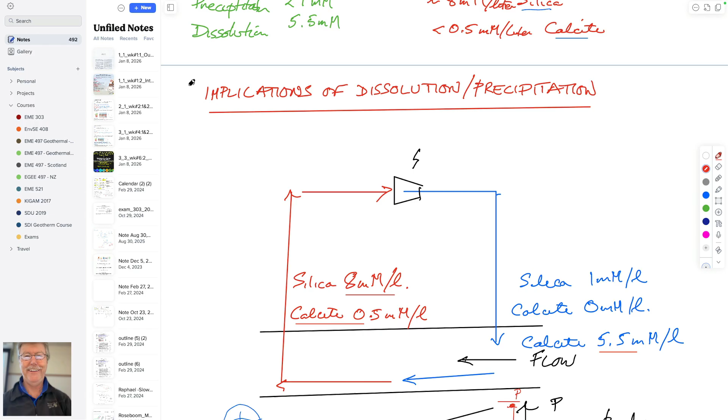I'm feeling punchy today, I guess. I'm not sure. No comments for the good of the order.

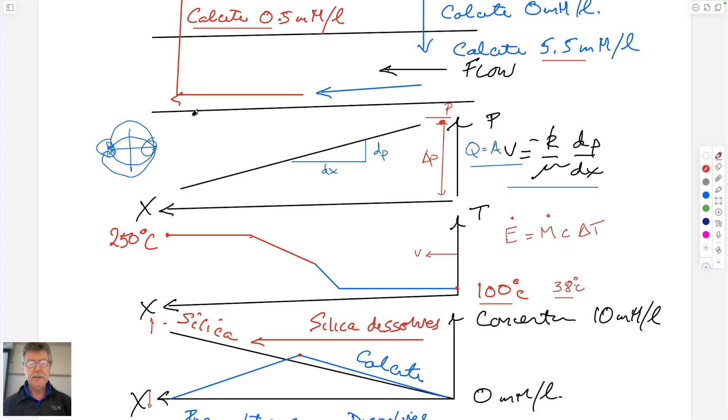I noticed in looking at the previous recordings for these classes this week, 6.1 and 6.2, that they had nice long introductions of places, of geothermal reservoirs around the world - Svartsengi in Iceland particularly starred, I think, on today's one in 2022 or 2021, I can't remember which. Anyway, I haven't done so much of that. I don't think you need so much mental health help now that we're way out of COVID - I think people were a bit more tender in those days and could use it. So that's why we did that.

We'll carry on talking today about geochemistry.

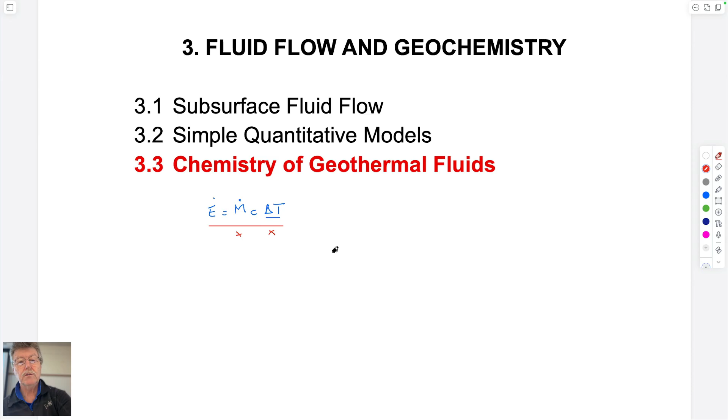Remember last time, if we zip back, we made the case that this is our all-important relationship that we have to deal with. We only make geothermal energy when all of these things are up, and two of them are under our control largely - if you use CO2, it has a different specific heat capacity. Mass flow rates by getting lots of water through in highly permeable connections, high temperatures by getting water through in tortuous connections which have large heat surface area, as we've talked about. And those can be influenced by mechanical changes, thermomechanical changes, contraction of matrix blocks and dilation of fractures as a result of that, but also due to chemistry effects.

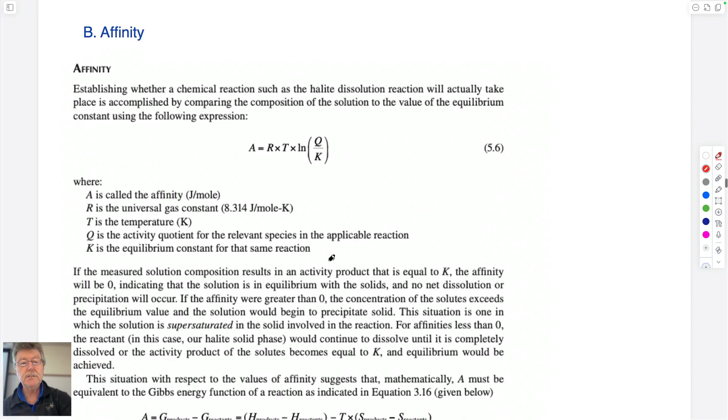So we talk about chemistry of reservoirs, the concentrations are typically high. We can look at understanding how dissolution and precipitation proceeds within reservoirs, whether they're retrograde or prograde reactions, and we can say something about the rates at which those occur, in addition to being able to define the equilibrium characteristics.

And we talked about looking at how these reservoirs are interactive in terms of processes - the physical flow condition, the chemical transport condition, and also temperature transport in those reservoirs. We represented it in the concept of these longitudinal sections from injector to recovery well.

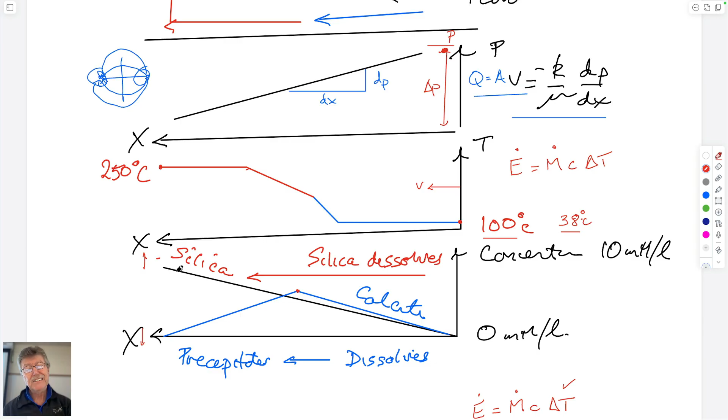We made the case that depending on the temperatures, we net dissolve material such as silica as the temperatures get hotter as we go through the reservoir, or precipitate retrograde minerals such as calcium carbonate as we go through. These would expect to have some influence on permeability, and in affecting permeability, maybe silica is not so important because we saw last time that the concentrations at equilibrium are quite low for silica.

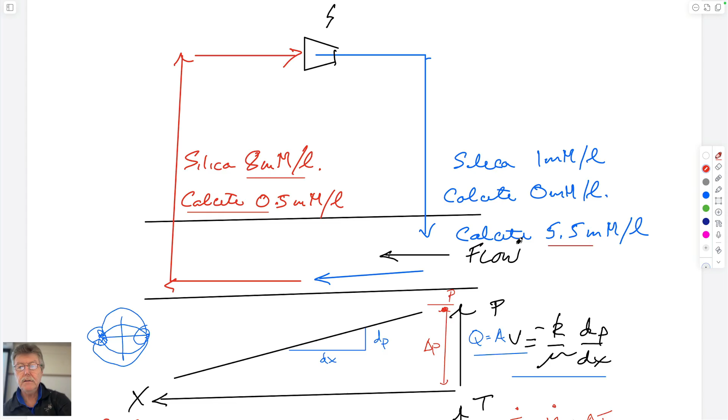Actually, they're similar to the temperatures we were looking at. But if you look at deposition of calcite, you'd expect to see that reflected in a signal on the flow system. And if we're precipitating at outlet, for instance, we'd expect the influence of that to look like this.

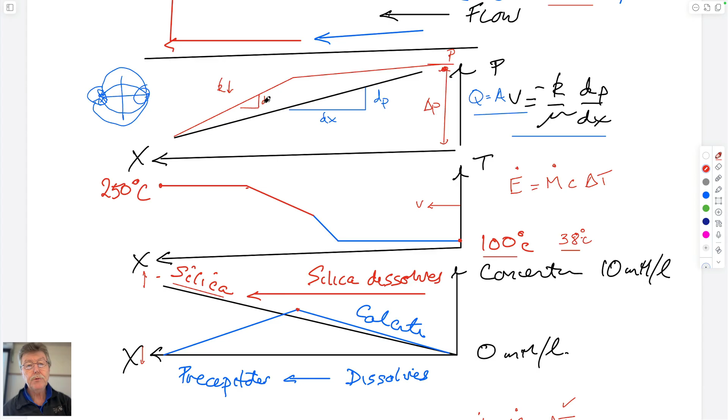Pressure changes across the reservoir would be altered, because if we have the permeability go down here, we have to have higher pressure gradients to drive fluid across the reservoir at the same velocity, because we have continuity if you just think of this as a one-dimensional flow within a tube. And so this interaction is kind of important to us.

There are very complex models to look at that. This isn't a modeling class. There's certainly stuff online you can find to get insight into that.

But we did make the connection last time that in terms of these three fields - flow behavior, transport of dissolved components, and transport of heat - we can define those by conservation equations that say the transport of some quantity, be it pressure, concentration, or thermal energy, conforms to mass: quanta of that in versus quanta out, and what doesn't balance ends up being an accumulation of that property.

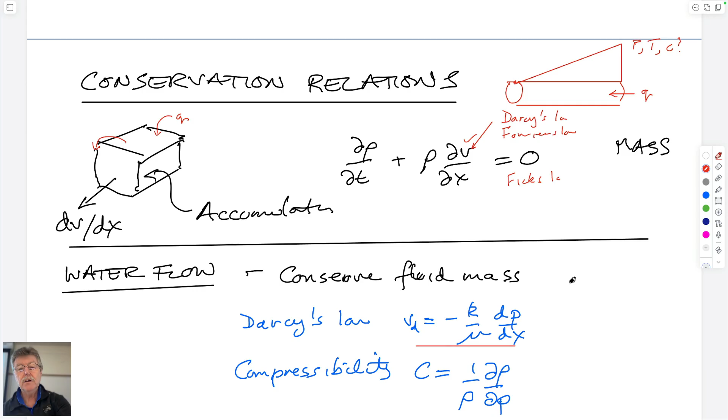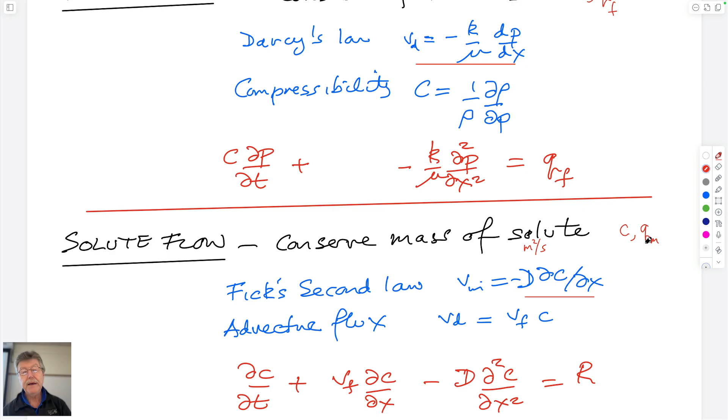And so the dependent variables we'd have for the flow system would be in terms of pressure and volumetric flow rate. The components in terms of mass solute would be concentration of that solute and mass flow rate of that - mass flow rate of the solute carried in water with advective and diffusive fluxes. And if we're looking at solving for the heat flow within the fluid and the reservoir, then the conserved quantity would be temperature and a heat flux.

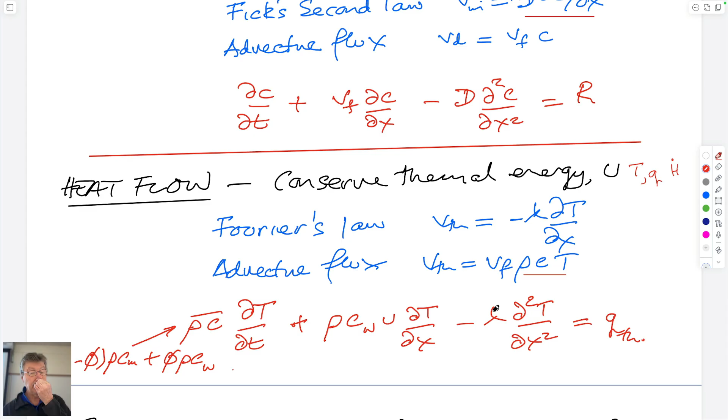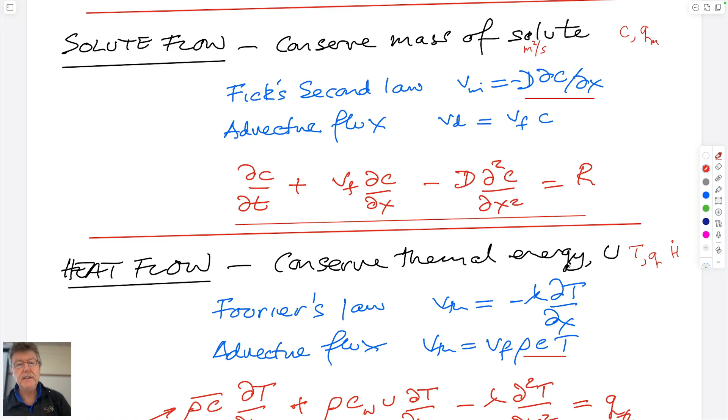What we've called H dot would be the equivalent of our heat flux. And so we can use these conservation expressions quite straightforwardly by substituting in for the conserved quantities - density in this particular case, this conserved quantity - and be able to write individual PDEs that represent these systems. One of these is for solute flow. We won't treat it in great detail, but we realize that each of these expressions are actually rather similar. They have an accumulation term, which says how pressure, fluid mass, dissolved mass, or thermal energy accumulate.

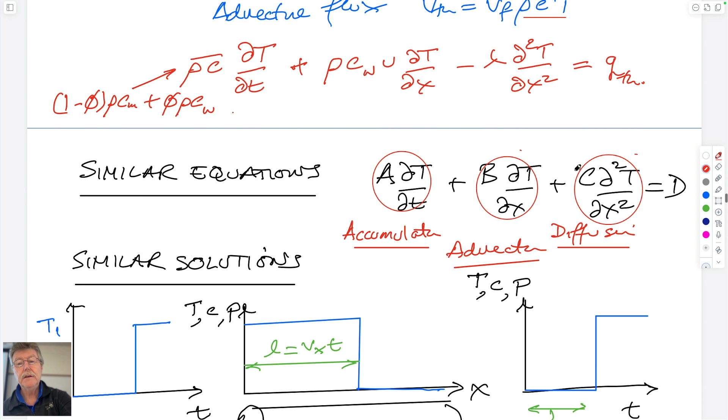We have a term that represents how it's carried by advection in the bulk motion of the fluid. It doesn't exist in the fluid flow equation, but it does for convective heat transport and convective mass transport. And also it can diffuse according to Fick's law, Darcy's law, or Fourier's law, which means that pressure, temperature, or concentration get driven by the gradients of those in space, dt, dx, through a coefficient, in this case defined in terms of thermal conductivity. All by way of saying that all of these expressions look the same.

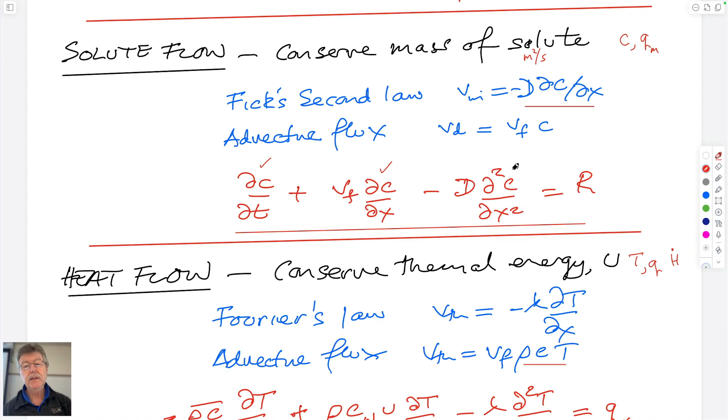And that the one we'd be interested in for mass transport would look like this: accumulation of dissolved mass within the water in an element, the mass transport of that by advection, and the mass transport of that by diffusion. And by way of saying, if we go back to this, it's exactly that expression.

So I'm not going to belabor this point, but if we're looking at fluids, dissolved components being carried down gradient or downstream, we can make that calculation just by solving a PDE like this. And in this, we have accumulation, mass transport by advection, and mass transport by diffusion.

If I write it differently, it's just dc/dt equals minus advective velocity times the concentration gradient in space, plus the diffusion coefficient times the second order derivative, d2c/dx squared. So this is how we've seen it before, and this is how it's written here, just by taking parameters onto the left-hand side and leaving this reaction rate term here. So this is just the same as this.

It has to be in the same units as rate of change of concentration, mass per unit volume per unit time. So you could think of this as an input of chemical species within the bucket according to these units that occurs either by adding it, or as a transformation between chemicals already present within the water in the system.

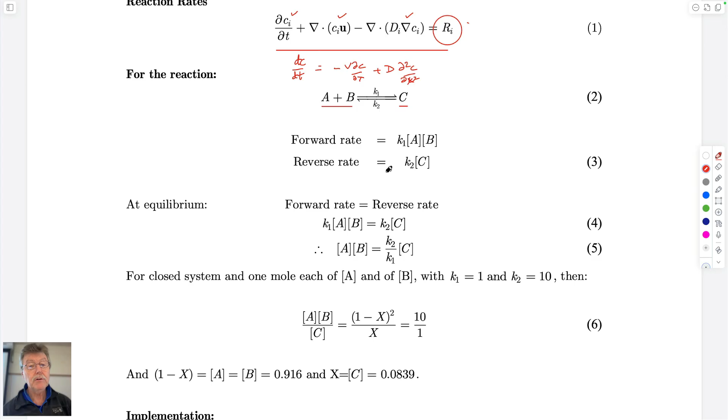So if we have reactants A and B that turn into product C, they're related by this stoichiometric expression that defines behaviors we talked about last time. When the behavior is at equilibrium, the forward rate of producing C from A and B versus the reverse rate of producing A and B from C is in equilibrium, so these can be equated to each other.

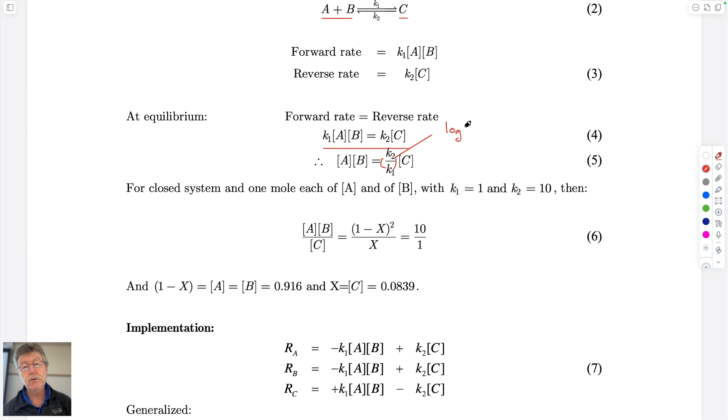We can write them as defined in terms of these rate coefficients K1 and K2, and as a result we can define a reaction rate coefficient, which is this. We called this, using a log, last time we called it log K for this solubility control. And we can define that in terms of these.

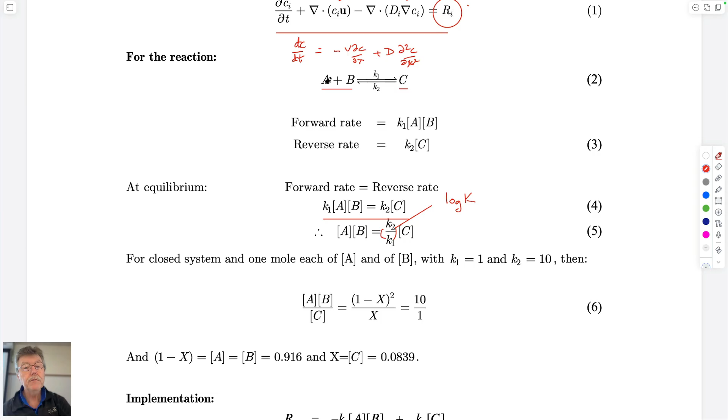If the stoichiometry of this is 1 mole of this plus 1 mole of this equals 1 mole of compound C, then we can define this in terms of what concentrations of these, in moles, we need or we'll get when we're in equilibrium. And so we can write that in terms of these reaction coefficients. We can just divide one side by the other.

And if we do that, and if we know the magnitudes of these rate constants here, which are 10 and 1, we can write this in terms of the molar concentration of C, which is X. And if we only have a single mole within the system, then by definition the concentration of A and B have to be 1 minus this concentration. So we can write this in terms of 1 minus X for A, 1 minus X for B, all squared, over the concentration of X, and it has to conform to this.

If you solve for this, you find out that the concentration of C has to be a bit less than a tenth, and the concentration of each of A and B is 0.9. So we can get the equilibrium behavior from this.

But also, relative to these reaction rate coefficients defining the forward and reverse rates of reaction, we can use this to define this rate coefficient. And this rate coefficient is exactly what this source term is, by which the rate at which we're adding A and B or C to the system is defined. So this is another accumulation term, or transformation term if you like.

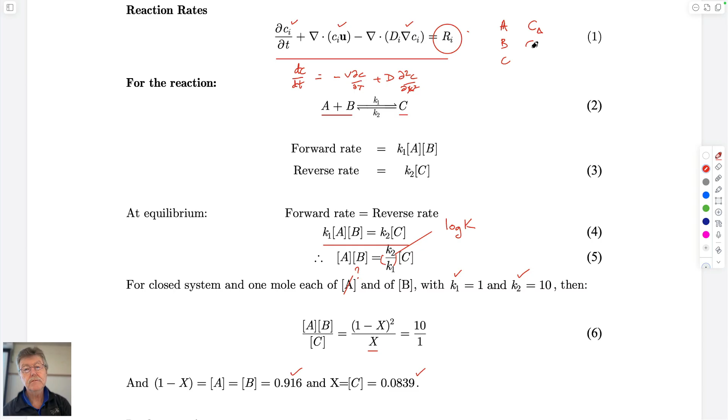So we'd have 3 equations. And for each of these 3 equations, we'd have values for these reaction coefficients, which are really the ratios of K1 and K2, but just defined in terms of what the actual concentrations of those are in the fluid at that particular time. So these concentrations define how quickly they will transform, so how quickly A will be produced, and that will go in this first equation.

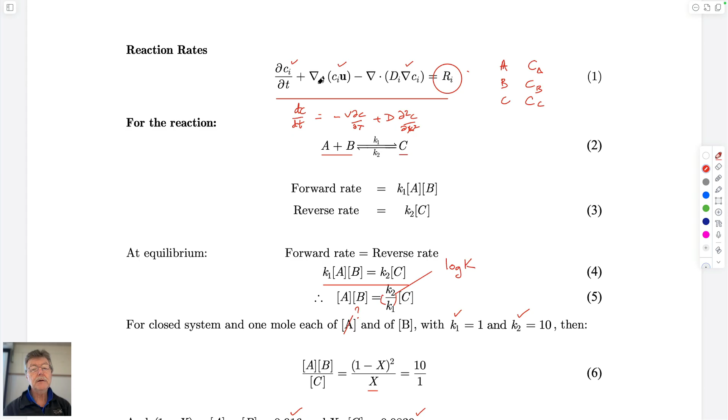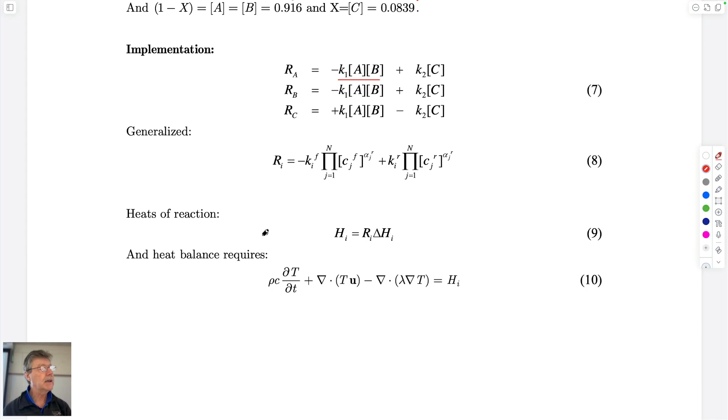So to be able to solve for 3 species going through from upstream to downstream, we'd write a PDE all the way through from upstream to downstream for each of those 3 compounds, components. And by adding these reaction terms onto the back side, we'd be able to get this transformation as we go from upstream to downstream. We'd be able to predict exactly what this response was in terms of silica and also in terms of calcite, based on how temperatures would change along the system and also how concentrations of the different compounds would change along the system.

The other thing that we could also rate, not important for us really, because it's very small in comparison to the heat that we already have in the reservoir. Also with these reactions, they may be exothermic or endothermic. They may create heat energy or they may consume it in allowing the reaction to occur.

And that can be defined in terms of the heats of reaction, which are defined for individual reactions, but the product of the heat of reaction, which is a physical parameter for any particular reaction, and the rate at which it is progressing, which is a function of the relative concentrations at any moment in time and position within the reservoir, every little box or element within the reservoir, we can add that into the heat flow equation in that we add heat or subtract heat from the reaction due to the reaction, and we can take a balance of that as we transit through the fluids in the reservoir.

So this is not to get the behavior of heat within the reservoir, but it's to allow for fluid flow, maybe starting at isothermal conditions, to be able to define exactly what the temperature distribution would be in the reservoir as a function of heat input. And of course, if we're working in a reservoir which has already got cold water flowing through a hot reservoir, this would also describe that behavior.

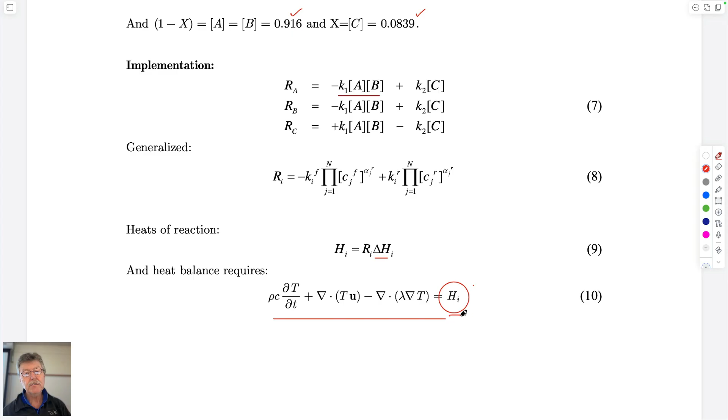Turns out that these heats of reaction are going to be trivial in that particular system. And so, all by means of saying that...

I had my pen on the pad, it doesn't allow me to move.

All by way of saying, if we have a complex relationship, we have multiple fields operating that interact with each other. We have concentrations changing permeability. Permeability will change the pressure distribution through the reservoir and change the rates of flow overall to the effluent well. We have temperature changing in the reservoir, which will affect the outlet temperatures. This will be also influenced by the changes in flow rates for the system. High flow rates will, as we know, change the pattern of how we draw down heat within the reservoir and deliver heat to the exterior recovery well.

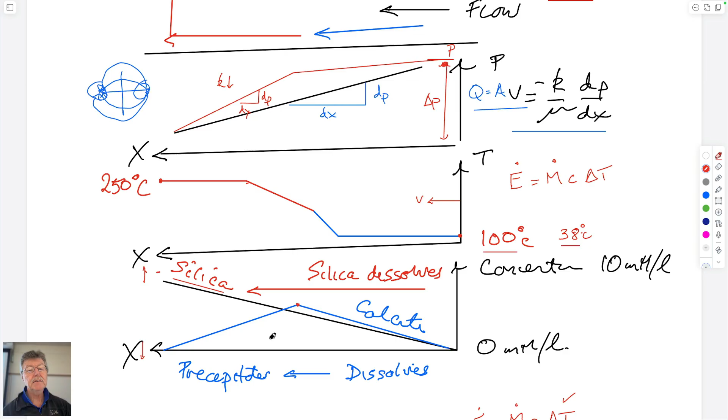So it turns out that understanding these behaviors is a critical part of geothermal energy. So it's not a modeling class, but perhaps you can get at least a flavor for the fact that it turns out that the things we do in modeling these systems in reservoirs isn't so different from what we would do within a contaminated aquifer.

But since we know that pressure drives flow within our reservoir due to Darcy's law, that heat flow within our reservoir is controlled by Fourier's law and the conservation equation, then we can write the equations. In this case, we've most recently written the one for concentration like this. This is exactly what we've seen.

We have an accumulation term, we have a transport term, mass in, dissolved mass in versus dissolved mass out of the bucket, where we divide the aquifer into a series of elements by diffusion and by advective behavior. We have a reaction rate term, which we just talked about, which is an input flux term, which we could think of it.

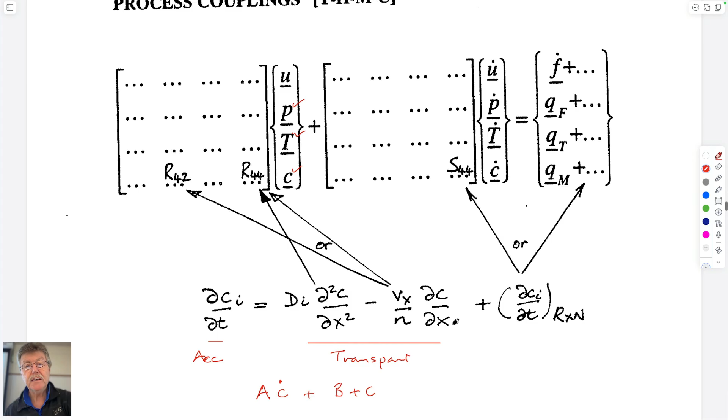And so what we can do is we can write this equation as something that looks like a matrix equation, that would be A times dc/dt plus B plus C. I think I did this here, right? And just made the fact that these coefficients act on the advection term, diffusion term, and the accumulation term. I'm not doing anything different from that.

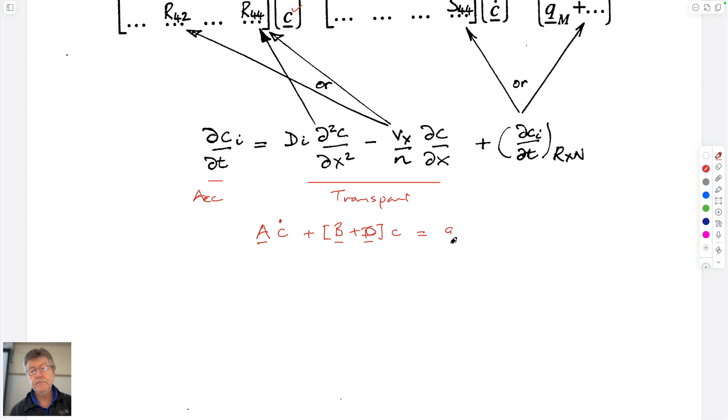But importantly, these would be matrices which would operate—let's call this D instead of C—and this is equal to Q. So what we could think about is that this is a matrix that operates on all the magnitudes of concentration changes in time at every single location in the system.

So we look at this upstream to downstream system. We look at defining individual elements which fluid flows between. Each of these elements have individual nodes in them and concentrations from upstream 2, 3, 4, 5, 6, 7. So all the concentrations for each one of these nodes are included in some kind of vector.

And so if we look at this, we can divide this into terms which operate on the concentration. These must include these spatial gradient terms, d/dx and d/dx squared, and some that operate on these rates of change terms—no spatial component here, only a change in time.

And so if we divide this up, we could put this equation together by writing this as—for this equation here, this is controlled by advection, so this term here would be this. This multiplied by concentration would be this term. But the reason it's entered here is that this term is a function of the advective velocity, and the advective velocity is a function of pressure through Darcy's law.

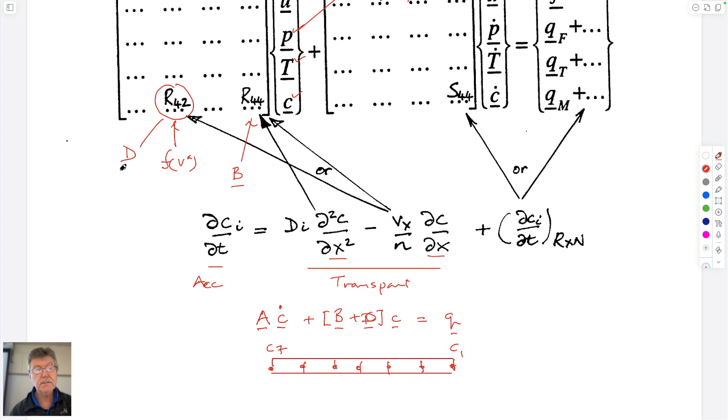And so this term would go here. So in our particular component here, that would be this—this would be D. The one that acts merely on concentration would be this term here, which we've called B, a matrix. And the one which operates on accumulation would be this term here, which we've called A.

So all by way of saying, we can take this equation and write it just as a single equation. This is just one equation, but it includes a matrix, which if we have 7 concentration magnitudes, this would be a 7 by 7 matrix. This would be a 7 by 1 vector. This would be a 7 by 1 vector. This would be a 7 by 7 matrix. This would be 7 by 1.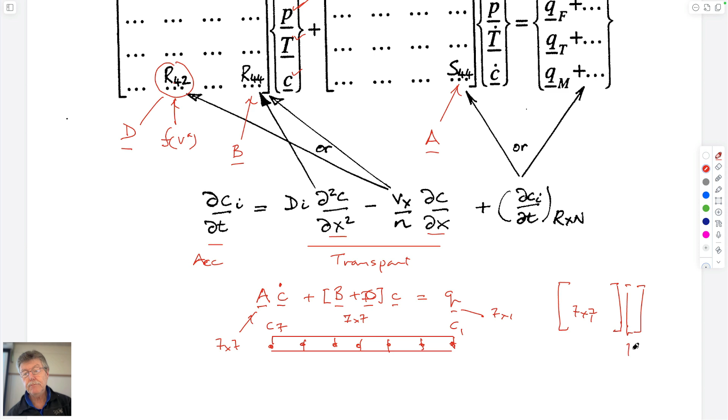So in other words, it would look something like this—7 by 7, all functions of the properties of the aquifer, and 7 by 1, C1 through C7.

And so we can do that for concentration behavior, the mass transport. We have a similar relationship for the thermal behavior. So this would be A T-dot plus B plus D T equals this. These would be new, different matrices.

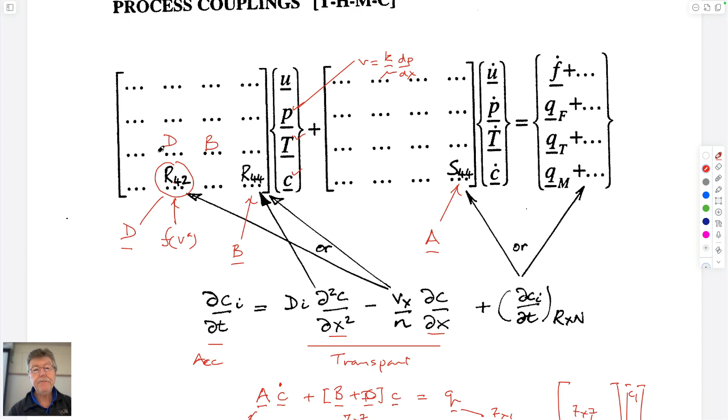These would be vectors just like the concentration, and so these would operate here. This is the one that's operating on diffusion, so this would be B. This would be D, because the advective flux that's driving this would be driving the temperature.

This is defined by the advective flux, which is defined by Darcy's law, so it has to operate—this times this would be part of that equation. And the accumulation term would be A. This would be for temperature, this would be for concentrations, this would be for temperature, this would be for temperature.

And if we did the same for the flow equation, we'd end up with a term in here which would be B for fluid flow. This would be A, which would be our storage term for fluid. The point I want to make is that since we're interested in the interaction of these fields—how pressure influences closure of fractures, how changes in temperature allow fractures to open and change the permeabilities, which would go into this term here, changing permeabilities—then we can get the interaction of these by solving a very complex suite of equations which allows the interaction of these.

Importantly, if we ignore the advective term—if we forget the advective term—the only terms we'd have within this matrix would be the terms on the diagonal here and the terms on the diagonal here. This means that fluid flow, heat flow, and mass transport of dissolved components all occur in isolation, because they're not linked to each other in any way.

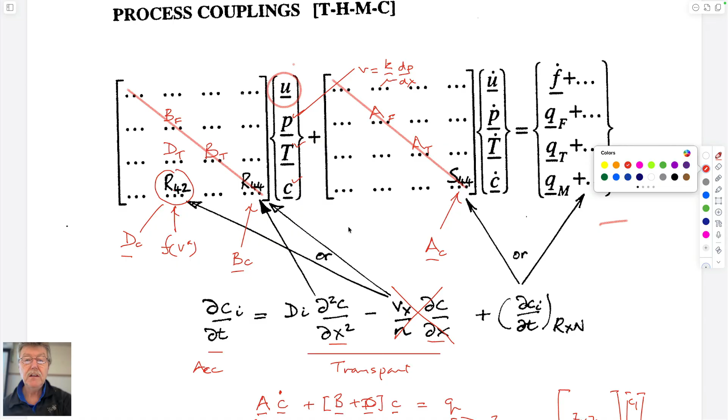We haven't and won't talk about displacements in this class, but clearly if you cool down an aquifer, the matrix blocks contract, the fractures expand, and there's a feedback as a result of that as well. We could also incorporate that if we wanted to. So that's all I want to say.

This is way beyond this class, well, it's not part of this class, but it's worthwhile painting the big picture. There's a whole course online if you look on my website on how to solve those things. I thought I'd finish off today by looking back at some of these things, only in a very specific component.

The talk last Friday by Hui Wu, or Wu Hui, I forget which, was talking about these interactions, both mechanical, thermomechanical, fractures getting larger or smaller due to heat, chemical dissolution, either for prograde dissolution or by precipitation, and also pressure solution was one of the things. The interest in this is exactly what these interactions bring in terms of changes in these systems.

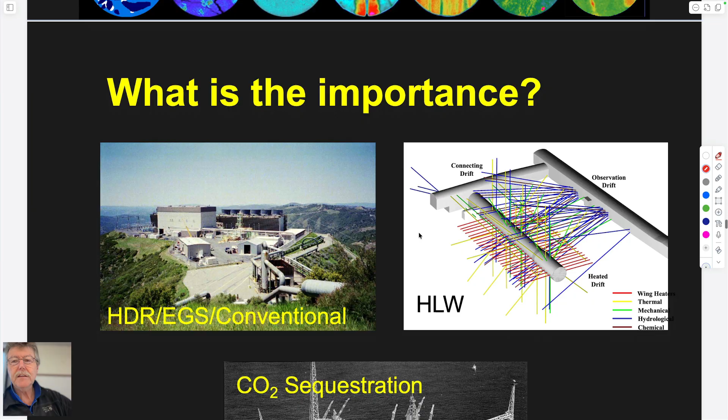This isn't particularly new. This is more than 20 years old now. I can remember presenting this at a meeting in Stockholm in 2003, among other places. Just making the case that these kinds of behaviors are important in lots of situations.

This is the schematic for Yucca Mountain, the drift heater, the large-scale drift heater test. It comprised a single drift off an adit off a main drift, an observation drift. In this drift were a whole bunch of railroad tanker cars like those you see carrying oil, which were heaters used as surrogates for heated radioactive waste canisters placed underground. It was to understand the behavior around this drift as a function of heating it.

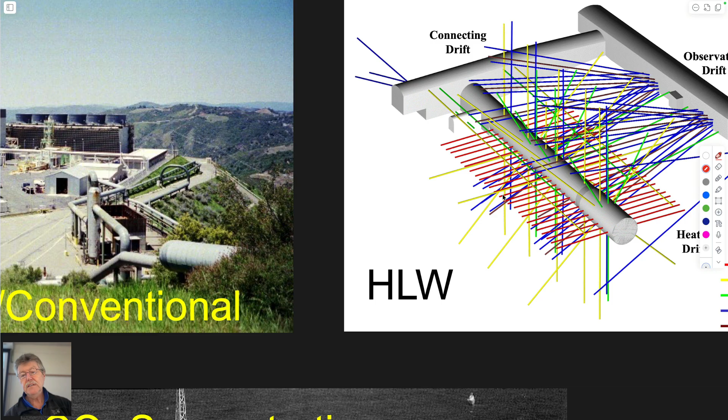The idea is that the drift would contain the canisters, but next door to the drift would be another drift with canisters as well, possibly on 50-meter centers for a whole repository. So to get some of the effect of these adjacent boreholes or drifts warming it up, these wing heaters were also present to bring up the temperature.

It was turned on in December 1997. I remember I was there a couple of days after it was turned on.

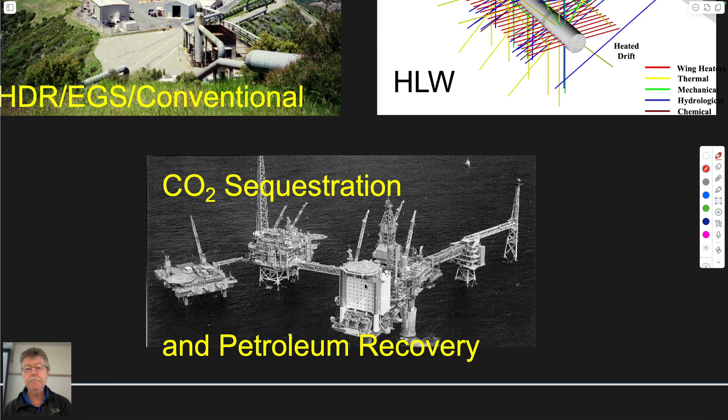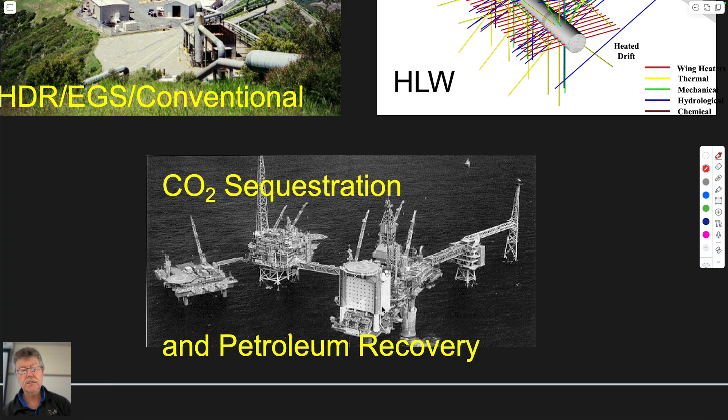And this may not be Sleipner. Sleipner is a famous CO2 sequestration site where they are injecting CO2 in the North Sea off the Norwegian coast, as part of a requirement that when they bring gas out rich in CO2, they're required by Norwegian law to re-inject the CO2 into a lower reservoir on the seabed. So these things that we're talking about... I can't change the size of this now, don't know why.

So these THMC processes, often referred to as THMC - thermal, hydromechanical, chemical processes - the fields themselves can operate on their own, as we just talked about, without any interaction.

But as soon as you add convection into the system - convective transport of heat, convective transport of dissolved mass - then all of a sudden they're linked. And once you add mechanical behavior, these systems are very strongly mechanically linked, primarily because permeability is a function of aperture cubed. So a small change in aperture will make a big change in permeability.

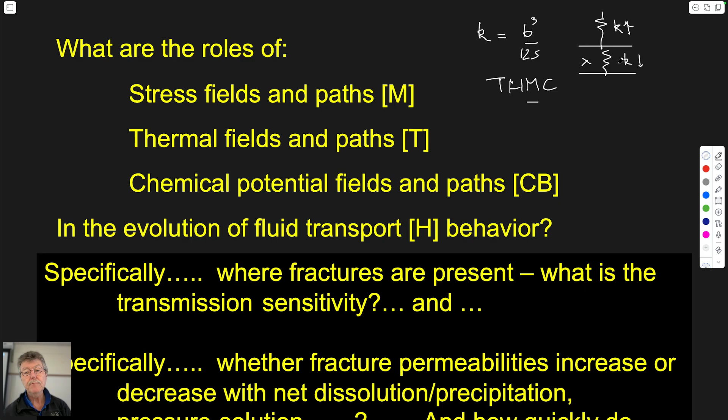Fractures are the softest part of the system. The matrix blocks are very rigid, the fractures are very soft. So if there's any stress change, almost all of that stress change will be manifest on the fractures, which are very soft. So the fractures have a stiffness like a spring, and the blocks have a stiffness also. This stiffness for the blocks is very high, but this stiffness for the fractures is very low. So if you get a change in stress, almost all of it will be visited on the aperture of the fracture. So fractures are incredibly sensitive to changes in stress.

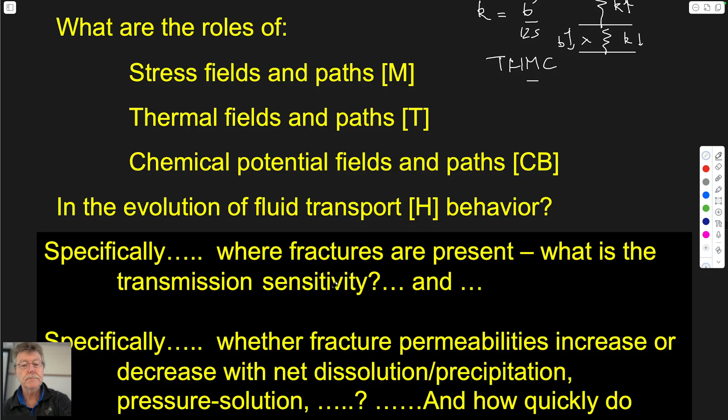Understanding what happens within these flow fields is of interest, so there are lots of complex models that link thermal, hydromechanical processes. When you get changes in temperature, it affects permeability and flow, and it also affects the mechanical deformation through the stiffnesses, which is manifest on the permeability field and affects transmission through the system. Big experiments like this, and the FORGE project, are demonstration projects to look at field scale how these complex interacting processes interact, to physically determine whether they increase or decrease permeability, where, for how long, and to define what exactly those impacts are on the full system.

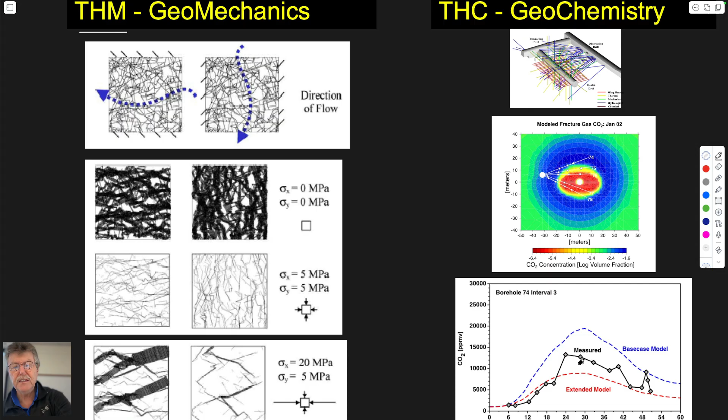In this particular test, there were 4 years of heating and 4 years of cooling. The temperature fields around the drift were monitored with boreholes, and changes in CO2 emissions were also evaluated. These are just some of the experiments we ran to look at those complex processes.

To make the cases, sometimes things aren't what you expect. The materials used were novaculite, which is basically 100% quartz, so this would be prograde: as you increase temperature, it will preferentially dissolve the material and put it in solution. Limestone is the opposite, retrograde: as temperature gets warmer, it becomes less soluble and deposits. I'm not sure we thought about that at the time, but we did the work primarily on the novaculite. They behave rather differently. The reason for choosing quartz-rich rock is that when you dissolve the material, you don't change pH, so you don't have to worry about that when analyzing results.

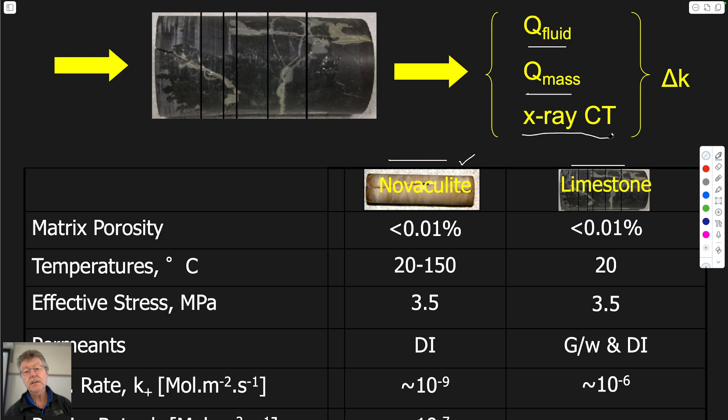These are experiments done on core. The idea is that if you flow from one end of the core to the other under a pressure gradient, you can measure the fluid that comes out of the fracture, and measure the mass of dissolved components to get a mass balance on what's dissolved from the system. You can also look at changes in porosity using X-ray CT, if the resolution is high enough to see what's going on.

These experiments were done here, in the CQI as it was called then—I think it's still called the Center for Quantitative Imaging. This is a chalk core, not a novaculite core in our case. These are flow rates in and flow distributors in, plumbing to get water out and water in. There are 3 individual tubes to run 3-phase experiments with 3 different fluids, although we just used 1. A sample goes in the middle, with a latex sheath covering the whole thing, so you can put it into the core holder and apply fluid pressure onto the sheath as confining pressure. The sample sits inside the sheath, which sits inside the core holder. The ends of the core holder are sealed, so you can pressurize it and flow from one end to the other.

We wanted to run the experiments at temperature while flowing, inside a transmitter-to-receptor setup, with a CCD camera and a radioactive source for X-rays. The core holder sits in a chuck, like you'd see on a lathe, which turns through 360 degrees and back, scanning as it moves up and down the stage, so you can take multiple slices as it rotates backwards and forwards. You don't usually do that to a patient in the hospital—you lie on a bed in a CAT scan and it rotates around you. But here it's more convenient, and gives better resolution, if the X-ray is fixed and the sample moves both up and down and around within the scanner.

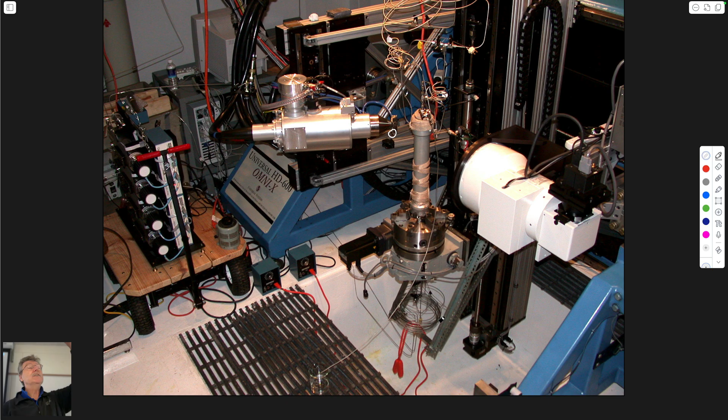And since we wanted to do these heat experiments at temperature, we just wrap this in heater tape. So this is just heater tape, a resistance heater that will bring up the heat, and it actually had a sheathing of the insulation that you see put around pipes to be able to hold the temperature in.

So this is basically the idea. You have a pressure in, you have a pressure out, you measure the pressure drop across the sample with a differential pressure transducer, you apply a confining pressure on the exterior of the sample, which has a fracture along the length of it, which water will flow along. You collect the fluids at the outlet, you measure concentrations to get an assay on the mass that comes out, you try and get changes in porosity from the X-ray CT, and you can use Darcy's law to calculate what permeability is from measuring the volumetric flow rate as a function of a known pressure gradient you apply across the sample. That's a sample.

It came from Arkansas, as I recall. It was Arkansas novaculite. Had a break in it, had some staining. It was a natural fracture. It was drilled along the axis of the originally present fracture.

And this is the response. The reason to always do experiments. So what you could do is, if you have Darcy's law, I guess this would be an area. If you apply a pressure gradient from end to end over a given length, you measure the flow rate, you can calculate permeability. If you know permeability, you can calculate equivalent aperture, which is what's shown here. And so this is a proxy for permeability. You could just as easily have plotted permeability, I guess.

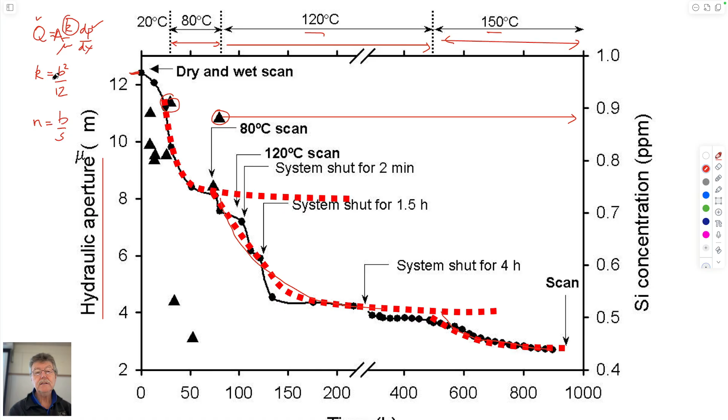Then when you take it up to 150 degrees, obviously the pressures in here are bigger than atmospheric because it doesn't boil. And again, the permeability goes down. So you're net dissolving material, you should be net increasing permeability. And we also know that porosity is equal to aperture divided by spacing. If you net dissolve, you'd think that you'd net increase permeability. Doesn't happen. So something else is going on.

So what you could do is look at calculating how much material is dissolved. In other words, you could look at a fracture and how it changes aperture. So if for some reason the aperture changes and it's being reduced, and it changes by some amount, delta B, and this occurs in some small time step, you can calculate what the dB/dt is.

Because you can get this from permeability, right? You can calculate directly from changes in permeability. But also, you'd expect that this dB/dt, if you multiply this aperture change by the density of the dissolved mineral—if it's being dissolved, you'd expect it to go the other way. If this is mineral material that's being removed, then the mass of that mineral would give you, if you sum it up over the whole fracture, a mass concentration that comes out of the fracture.

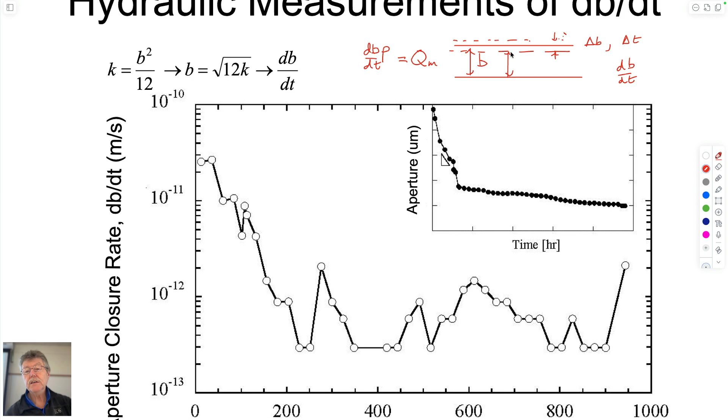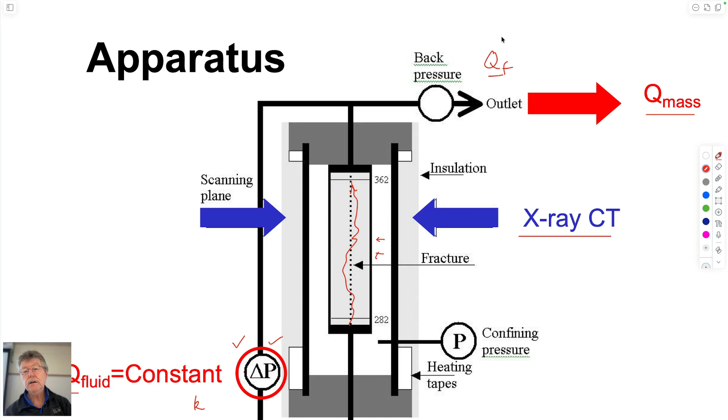So the idea is that if you measure both the dissolved mass concentration coming out and the volumetric flow rate, Q flow coming out, this gives you an idea of the change in aperture through the mass balance in the fracture of the dissolved mineral, and this gives you something about the fracture measured from the flow field. So you can look at comparing these. We can definitely measure this in the effluent fluid, we can definitely calculate the other from measuring the change in permeability as a function of time or aperture, and we can compare the two as an aperture rate.

We can look at models which would describe exactly what's going on. And if these measured rates of dissolved mass coming out of it can be correlated with what we'd expect to happen from some kind of model, then if we can get congruence between our model and the actual measurements, we have a chance of being able to limit exactly what's going on.

Of course, if the fracture permeability is going down with time, it suggests that we're net dissolving material, but for some reason the fracture is closing. The observational data suggests that if permeability is going down with time, we're net precipitating stuff, and therefore we're occluding the fracture. But that's not what we see.

We're net dissolving material and getting this result as a function of that. And so the suggestion is that what we're getting acting in this system is pressure solution. So the idea of pressure solution is that if you have a fracture which would look like this, this is an idealized part of it. If you take the asperity contacts and isolate exactly what they are, like this.

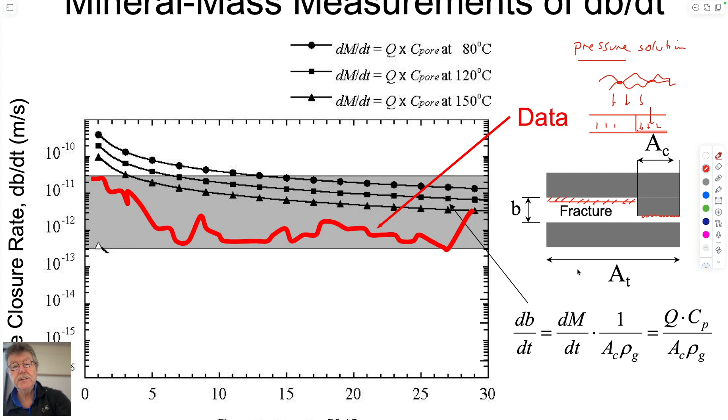So you can measure the concentrations dissolved in water. You can measure the permeability change and correlate those. The other hope would be that you could measure the porosity changes in situ by using X-ray CT.

That's often possible in porous media because the pores are big in relation to the resolution of the CAT scan. And in fact, the resolution of the CAT scan is usually defined as a function of the sample size. It's usually a 1,000th or a 2,000th of the sample size, because that's the size of the screen that collects the ray from the source through the sample and then onto this raster on the CCD screen. And so the resolution is usually 1,000th or a 2,000th of the diameter of the sample.

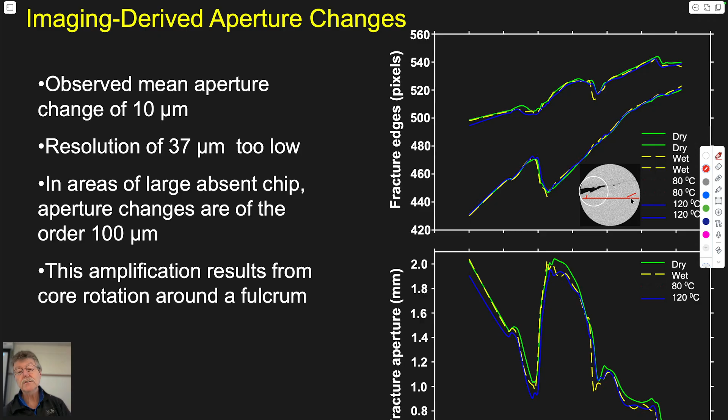And so all you can pick up in CT-ing it is a trace, which you can see here. This happened to be a chip within the sample where it was broken, which gives this big hole. But most of the sample that was flowing, this wasn't continuous, or it wasn't contiguous all the way along the sample. It was just on a small length of the sample.

So we tried to get information on porosity changes, but if you're net dissolving 1 or 2 or 3 microns from a 12 micron aperture fracture, which you can't see in the first place anyway, you're not going to be able to pick up really many changes. So these are the contours of the sample, but it's not really very useful, which were easiest to see on the open fracture, but were not very useful.

You can thin section the sample after you do it. You see some evidence of dissolution due to free face dissolution. You see contacting asperity pits.

So this was a sample that was infilled with resin to be able to preserve the sample and then sliced. And this is a thin section slice across the fracture. These are the conduits of the fracture going into the page. This is infilled with epoxy right here. And you can see these asperities keeping it open. It's kind of a nice capillary model if you think about it. A stream tube here, a stream tube here, and a whole bunch of stream tubes here going into the page.

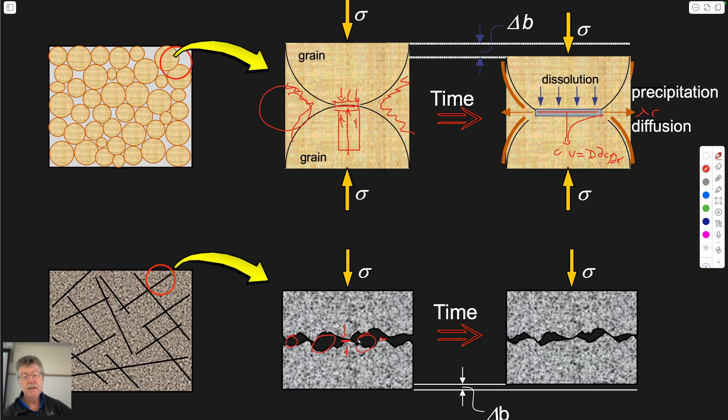The linkage with a fracture is that these capillary models can be applied to a fracture. This here would be a pore, a pore, a pore, separated by intervening asperities. This just happens to be a convenient geometry to look at a single spherical contact with a space around it. Exactly in this case, if it was a rigid material and it net dissolves stuff at the asperities, it would actually become more permeable, right?

If you net dissolve material here and it's a rigid medium, so the stippled gray area doesn't change, as you dissolve material here, it will increase the porosity and the permeability will go up.

The issue with a fracture is that it has a stress acting on it. So as soon as you dissolve material here, the upper fracture will follow with it and it will close. It's this overall difference between the top and bottom of these parts of the fracture which will close as it grows together, so it needs the influence of stress to drive that behavior. In our sample we have a constant stress applied on the edges of the sample in the core holder, and of course in a reservoir you'd also have those stresses acting in the system.

So you have a model that looks at this behavior, solving a diffusion equation to transport dissolved matter as it's dissolved into the contacting fracture. It goes into the fluid of the pore space, it raises the concentration in the pore, and all of a sudden at that concentration it's supersaturated. It can't hold that saturation in water, it's supersaturated because it's oversaturated by the fact that it's driven by the stress, and since it can't be held in solution, it will precipitate.

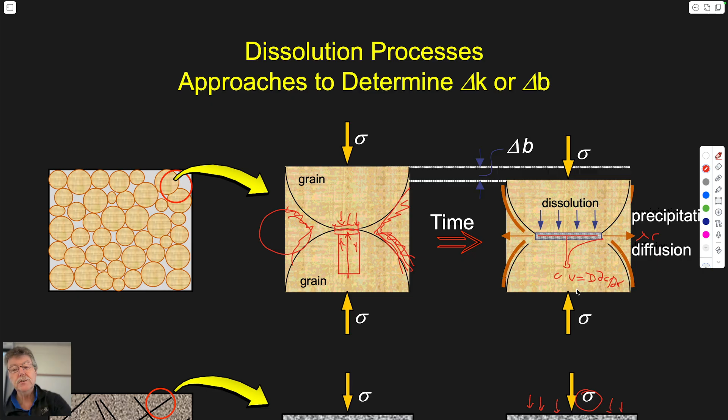So not only do you lose porosity by the fact that the grains are growing into each other and the volume in this region is decreasing, you're also precipitating material that eats up even more of that volume. So by both mechanisms you lose porosity.

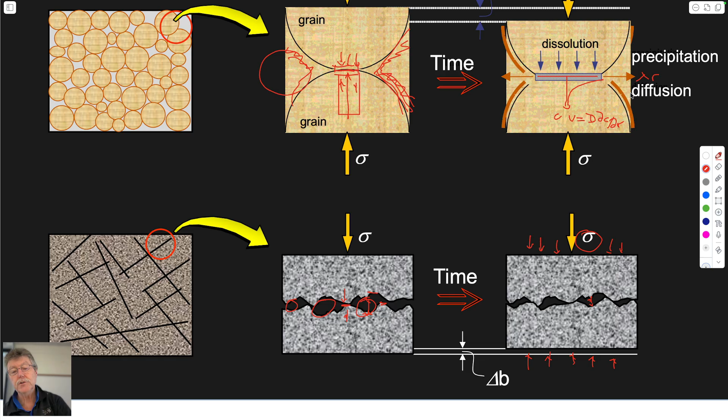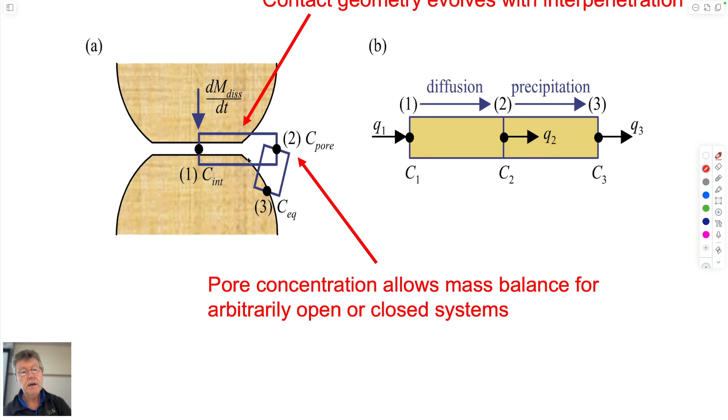So you can think about dissolution on the interface, its transport along that interface, and then once it gets into the pore, you can define the equilibrium concentration versus the overconcentration dissolved in the pore - overconcentration because it's come out from dissolution driven by stress - meaning it will precipitate. The rate at which it precipitates, armoring the side of the pore if you like, is controlled by this difference between the concentration as it comes out and the equilibrium concentration that the pore can ultimately hold. So you can make a little model that looks at dissolution, transport into the pore, and then precipitation onto the solid walls of the pore, just like this.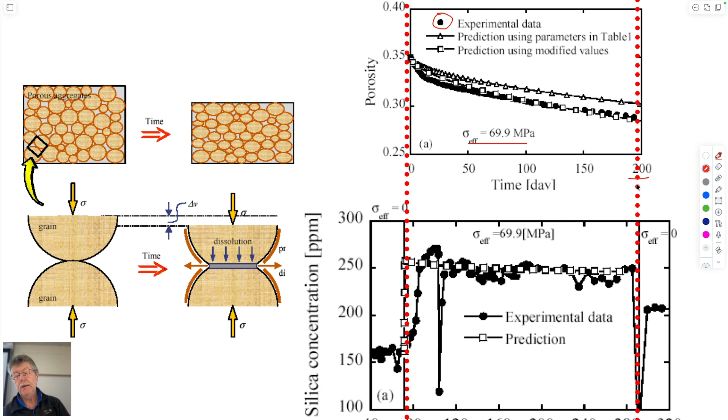And if you do that, you can model this behavior. This happens to be data from an experiment with a whole bunch of glass bead quartz put in a reactor under 70 MPa and left with water in that reactor for the best part of a year, half a year, to measure the porosity change as the load on the sample is constant, but as it's allowed to compact as pressure solution allows the grains to grow into each other by this process.

As a function of that, the measured data are these dots here, and the model results are these symbols which represent these processes as a very simple model. So you're able to follow exactly what you see here: you lose porosity in your bead pack as a function of time, with constant stress - stress isn't changing. All that's happened is you've jacked up the temperature to allow this process to activate, and it slowly activates.

It slows down. You could imagine that it slows down because this diffusion length grows from being a very small number to being a large number. As this diffusion length gets longer, we know that for heat transport or any diffusive transport, we have a dimensionless coefficient, which is a diffusivity multiplied by time divided by length squared. So as this length doubles, the time for any given dimensionless progress will quadruple. So as the diffusion length increases, the rate at which mass can be transported is reduced according to this square relationship.

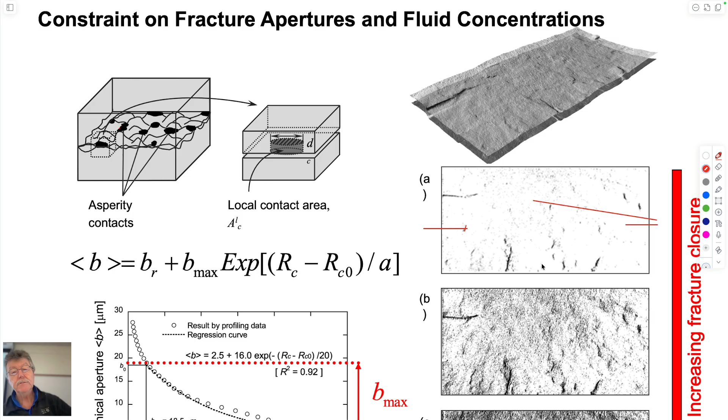You can look at flow within these two halves from upstream to downstream, and just look at a mass balance of water being carried within the fracture, dissolving material from around these asperities in the free face, having mass ejected into the water by pressure solution from mass balance and being transported downstream, then being able to precipitate, and look at the growth in the contact area of the fracture. Contact area is shown dark here, growing as a function of time.

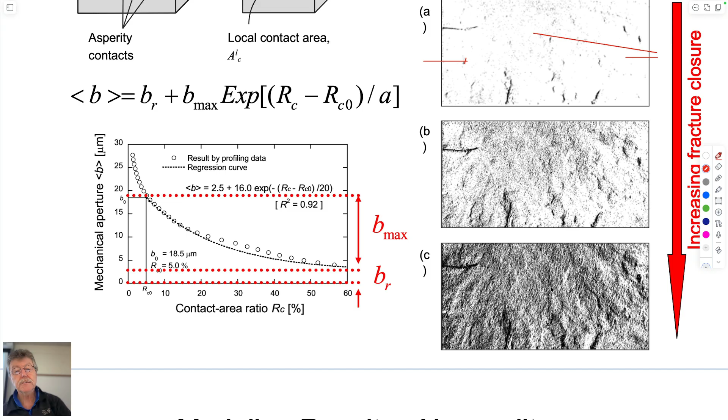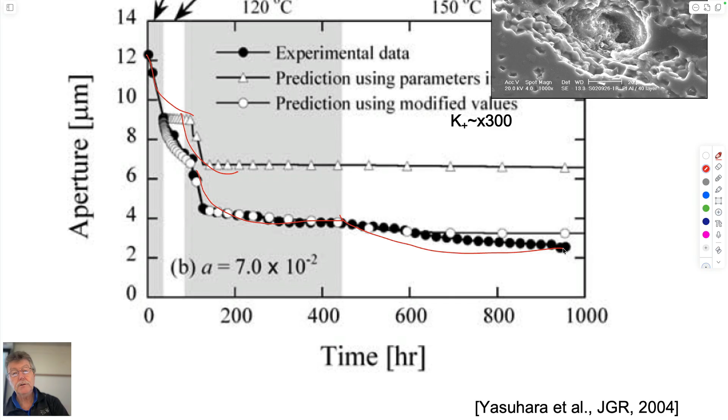And you can try to represent the data that we just looked at with changing temperature, changing temperature, changing temperature, changing temperature - those are the experimental data that we have, trying to represent that behavior essentially by pressure solution in this particular case. The utility of that is that if you have a model that represents behavior, you can use that model to do what-ifs: what's going to happen if I change the temperature 10 degrees, 100 degrees higher? What if I increase the stress? So these are just runs of a model to look at what-ifs.

So this is a model to look at the progress of permeability or aperture. Decreasing aperture would be decreasing permeability. What happens if we stress up a fracture to some magnitude and then start increasing the temperature? If the temperature is low, you get a slow change in permeability. If you increase it, it becomes faster, and if you increase it again, it becomes even faster. This is in terms of days - this would be 1 year, etc., this would be 8 years or so, something like that, 7 years. So as you increase temperature, you increase the activation of this, and it becomes much faster.

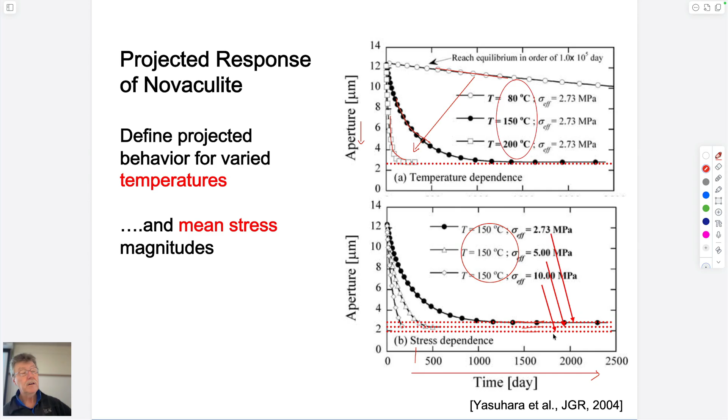And you can determine how much faster it becomes in a quantified way. Likewise, you could hold the temperatures constant but change stresses. If you do that, as you increase the stresses, the rates increase a bit, not as quickly as before, just a small change. But as a result of changing these stresses, the closure that you get becomes larger with increasing stresses. So you don't change the rate at which it occurs very much as you change stress, but you do change the end magnitude of the closure of the fracture. You can use that in a model to represent the behavior in a reservoir, which was part of the reason for this - actually, the work was funded as a geothermal project.

So the final one, we'll finish with this: the same kind of experiment but on a limestone fracture. This has much greater reactivity, much greater dissolution characteristics. It was done at ambient temperature, no temperature effects here. It was flowed with groundwater, with dissolved components in it, in equilibrium with the rock, and then it was flushed with distilled water. So when it's flowed with groundwater, you see the actual change in permeability, hydraulic aperture if you like, decreases by net dissolution from the fracture into the water, and then the closure of the fracture due to the action of pressure solution.

When you start injecting distilled water, all of a sudden you increase the rate at which you dissolve material, presumably by pressure solution, but then all of a sudden spontaneously the permeability starts going up again.

We explained this with the idea that you have a fracture with capillary flow tubes, fluid flowing into the page. As you net dissolve it, the walls of the fracture grow together and the permeability decreases.

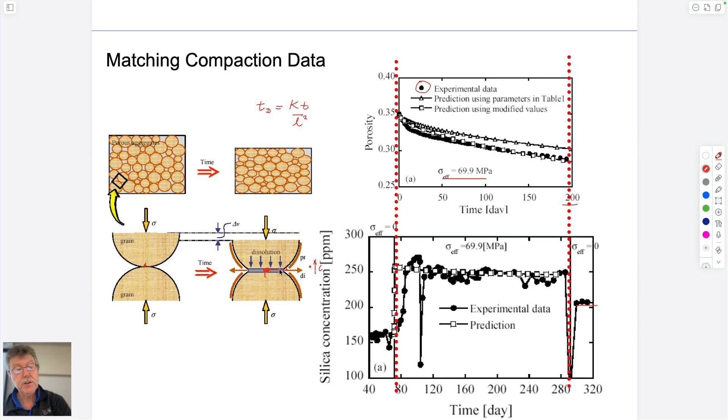But once you get to a certain closure, the rate at which pressure solution can transport dissolved components occurs on a longer anvil. The contact goes from a short contact to a very long contact. As it gets longer, the efficiency of ejecting mass into the pore fluid decreases.

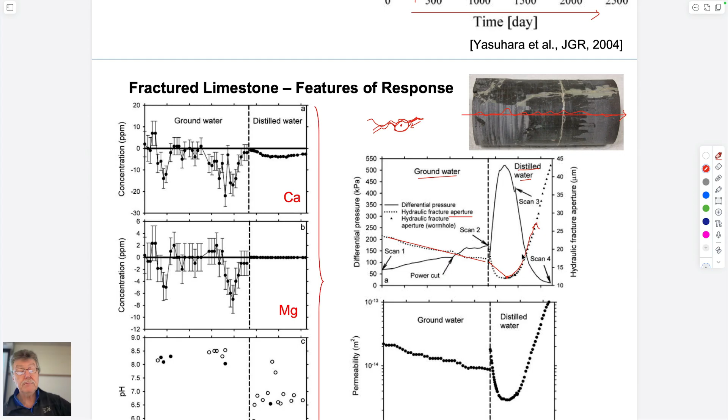At that stage, free face dissolution on this conduit starts to grow, and this pressure solution is swamped by this behavior. All of a sudden you get a wormhole developing its way all the way through from upstream to downstream. And that's exactly what it was - you get a single conduit down the middle of the sample, quite literally a wormhole.

The ramifications for a geothermal reservoir would be that you'd have great flow through the sample, a great increase in mass rate of flow through the system because the permeability's gone way up, but you'd have almost no heat transfer area, so that would go way down. The net effect in terms of what we're talking about in this class would be that behavior.

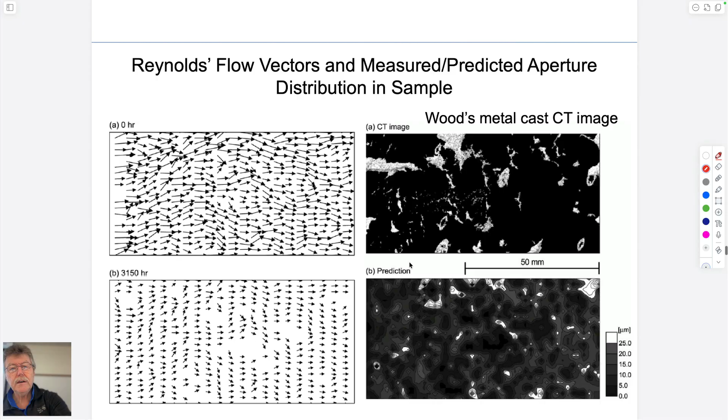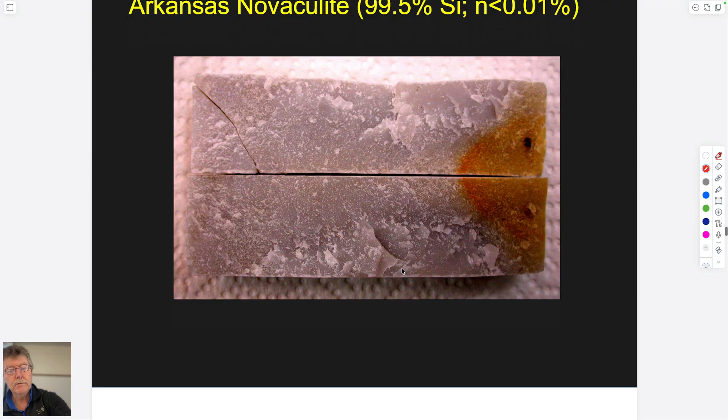The one thing we did do was, as I mentioned before, try to get an extra constraint on the experiment by impregnating the sample with epoxy and thin sectioning it. If you inject epoxy resin into the sample, it only takes it in the fracture, then you take the core and slice it literally across, and make a thin section you can view under a microscope.

The other thing you could do to the sample, instead of injecting epoxy, is inject something you could make into a cast that wouldn't bond very well with the rock. One such thing is Wood's metal - an alloy which might melt at 80 degrees centigrade and become liquid, and you can force it into the sample. Then once you bring the temperature down to 20 degrees centigrade, lab temperature, you can make a cast out of it.

You can pull out a cast, separate the sample. You have this cast which represents the architecture, if you like, of the porosity, and then you can CAT scan it, or use a profilometer to measure the thickness and get an exact picture of that.

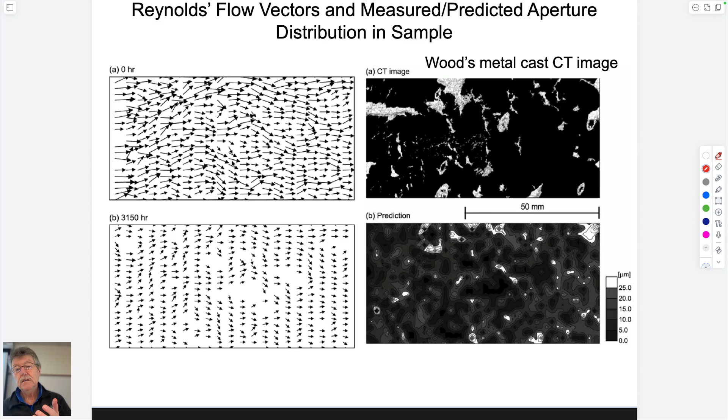You can use something like that to check whether the results from your numerical modeling - where you have constraint by measuring flow rates upstream and downstream to get permeability distribution, mass balances upstream and downstream to get the dissolved mass, CAT scan, which doesn't work, but measurements of the aperture gathered within a cast, an internal cast, a death mask of sorts out of the system.

That's mainly to reinforce the ideas that in our systems, the equation I just mentioned is all-important, and it really links together all of these multiple fields that we're interested in. That is exactly why we're interested in understanding these two parameters.

In terms of the big picture, this is exactly what's going on. We know something about the governing equations, and something about the mechanisms occurring as a result of fluid and mass transport and heat flow. Now we have to say something about the characteristics of our reservoir, so we can make predictions on what's going to happen if we do simple or complex modeling with the models we know these respond to.

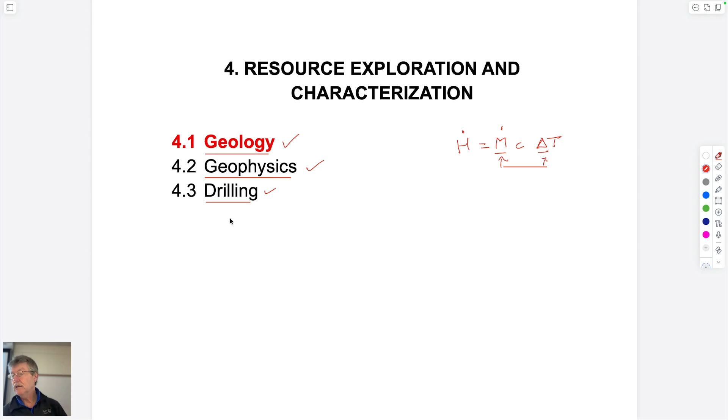To do that, we need to characterize the reservoir to understand what the geology looks like, by knowing the geological environment, characterizing it geophysically from the surface or boreholes, drilling it and taking samples, and running pump tests and injection recovery tests to measure the initial conditions within the reservoir. So that's what we'll talk about from now on.